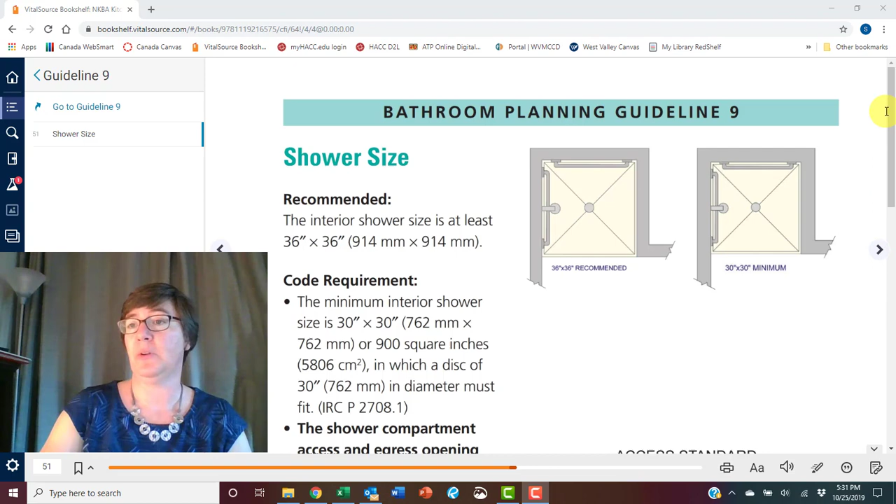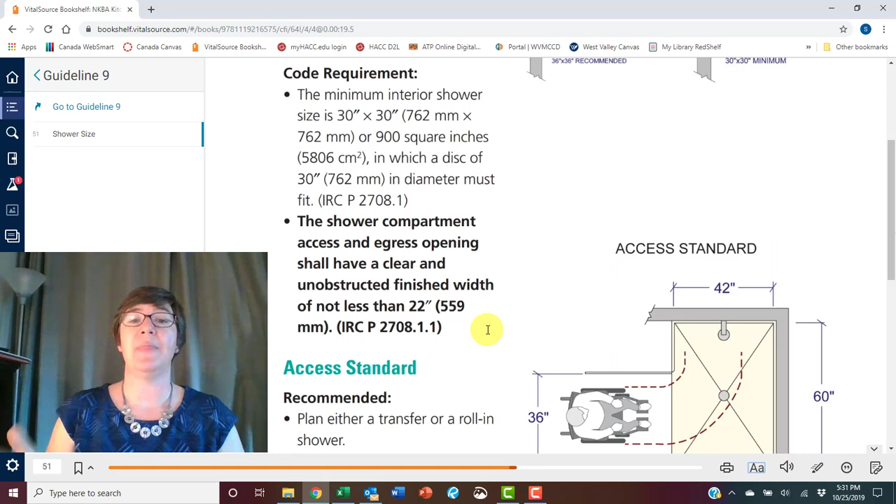Or if you have an odd size, there's some rules about exactly how small you can get: 900 square inches, in which a disc, so a circle of 30 inches in diameter, must fit. That's for some odd shapes and just to make sure you don't get too small. All right, there's one more requirement. Let me scroll down. Shower compartment access and egress opening. That's the door, the shower door. It has to have a clear width of not less than 22 inches.

Hi everybody. Somehow the first time I recorded this video I missed Bathroom Planning Guideline number 11. So coming back here to talk about number 11, water temperature safety. It turns out that too many people were getting scalded by accidental hot water exposure, and so a couple of codes were passed, and you are now required to use either pressure balanced, thermostatic mixing, or a combo of the two for your shower valve. Okay.

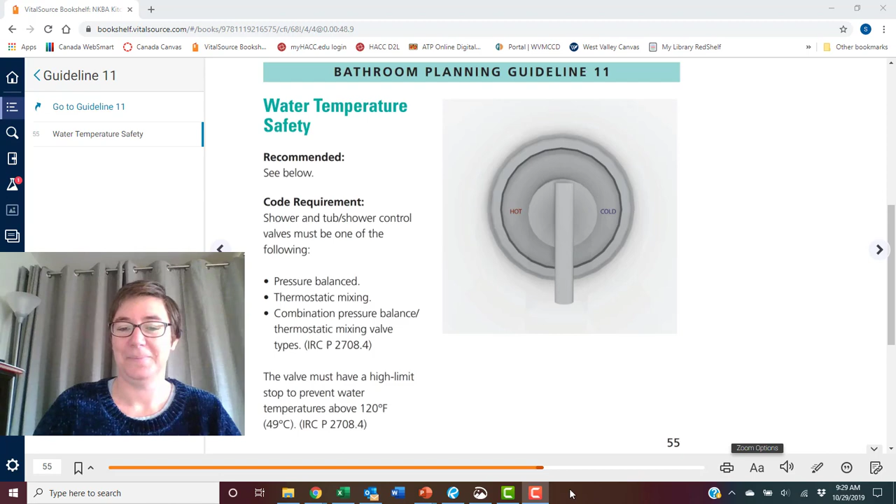Here we are at Bathroom Planning Guideline number 12 about a shower or tub seat. It's recommended that you plan a seat that's 17 to 19 inches above the floor. That's the height of the seat. And 15 inches deep. That's kind of the depth of the seat where someone sits down. The 15 inches is minimum. You can have wider, definitely. The 17 to 19, you should stay within that range. That's a comfortable seated height.

Notice that this planning guideline does not require that you have a seat in your shower. But if you do plan one, have it be this size. There's one more important bit here. There's a code requirement. If you have a shower seat, it can't infringe on your minimum interior size of the shower. So if you have that minimum 30-inch by 30-inch shower, you can't cut into it with a seat. You'll have to add width to add a seat.

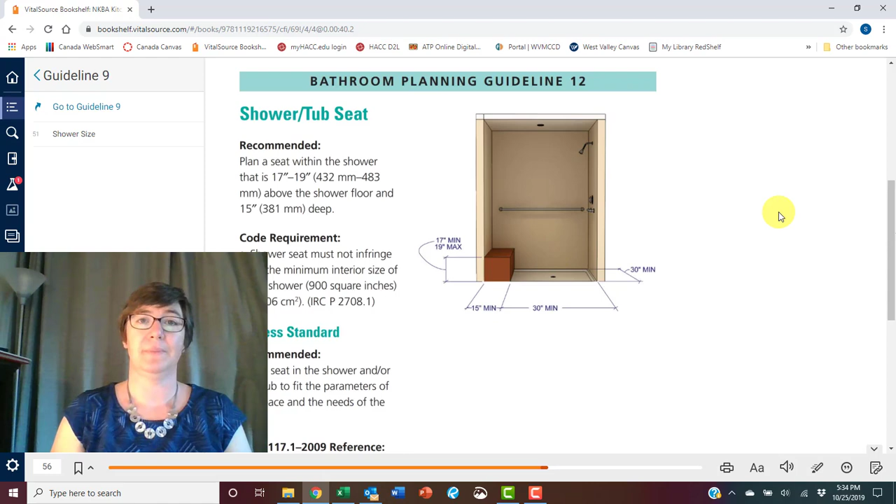Bathroom Planning Guideline number 13 is about the tub or shower surround. This is the wall area around the tub or shower. It's required to be covered in a waterproof material. Often this is tile. Sometimes it's a fiberglass, or there's a couple other materials, but those are the most common.

All right, the height of this waterproof material has to be at least 3 inches above the shower head rough-in. Sorry, that's the recommendation, that you pull it up at least 3 inches above the shower head, and that's this picture right here. So we're talking about the height of the shower right in here and going up above the height of that shower at least 3 inches.

Can you continue? Can you go 6 inches? Can you go all the way to the ceiling? Absolutely. All right, but at least 3 inches above that shower head. Now that's not actually required. The code requirement is 72 inches above the finished floor. And you see in this picture right here, 72 inches above the finished floor often is below the shower head. All right, so it's a different look and less protection for the wall, which is why the recommendation is actually to pull that up higher.

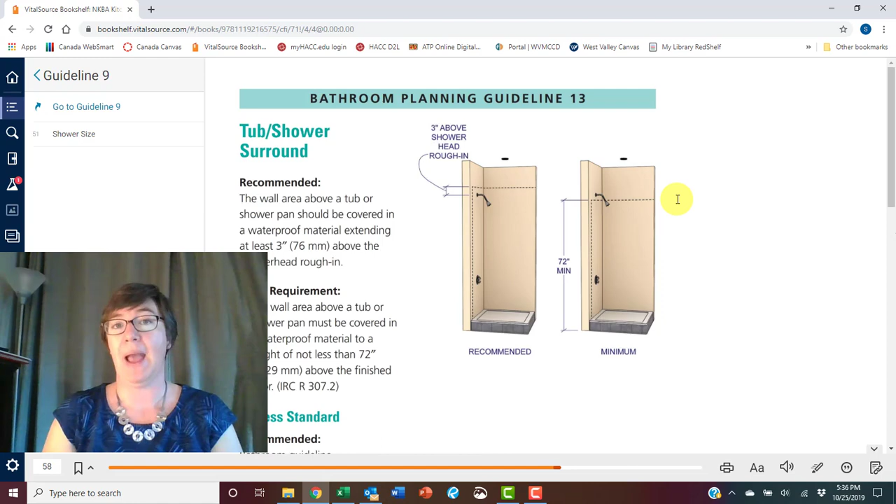Here we are at bathroom planning guideline number 14 about grab bars. It's recommended that you plan grab bars to facilitate access to and maneuvering within the tub and shower areas. In general, the tub and shower areas are slippery, and for people of limited mobility, grab bars are a good idea. But often people want to add grab bars later, and it's much more difficult. So what we should do is to prepare the walls ahead of time. When you're building or remodeling your bathroom, you need to prepare at that time to install grab bars later. And here's what that might look like.

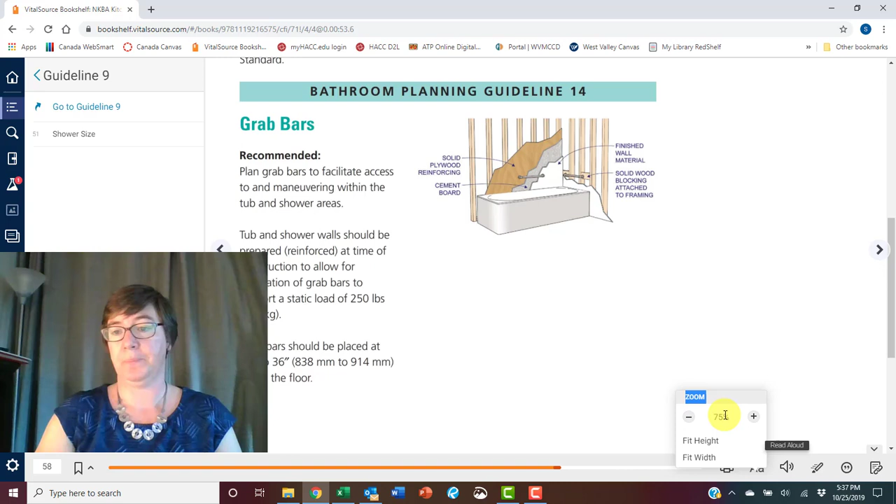Let me zoom in on this picture here. Okay, here we are. Here is your bathtub, and here are your wall studs going vertically in the alcove around this tub. Now, regular construction would put cement backer board, which is waterproof, on these studs, and then put the finish material on top of that cement backer board. So it would be studs, cement backer board, finish material, probably a tile. Okay. Instead, it's recommended here that you add a layer of solid plywood reinforcing.

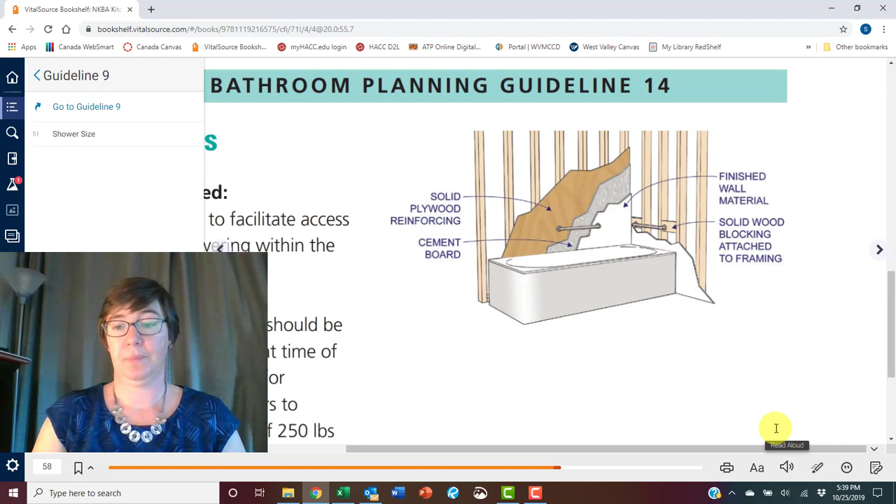If you add it to the whole wall, the benefit is a grab bar can later be installed anywhere that is convenient for the user. You don't have to specifically line up the grab bar with studs, or you don't have to open up the wall, tear out all that tile, and install solid backing where you would like the grab bar. So if you install a layer of plywood ahead of time, you can put a grab bar in later. All right, here I've zoomed back out to mention those grab bars need to support a load of 250 pounds.

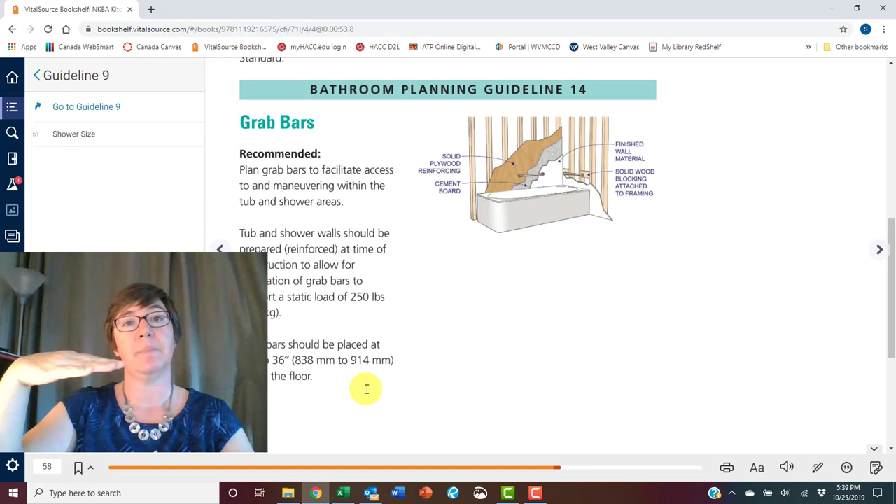Bathroom planning guideline number 15 about glazing. Glazing is a word that means glass. All right, so this guideline is about safety around glass in the bathroom. Because people in the bathroom are prone to slips and falls, we want to make sure they're safe. There's not an NKBA recommendation here, so we're directly referred to the code requirements. And the requirement is that all the glass used in the tub or shower enclosures, so if you have a tub or shower door or another glass wall to the side or something, they all have to use tempered glass. Tempered glass is the kind of glass that, if you hit it, breaks into those teeny tiny cubes. So no big sharp shards for someone to get cut with.